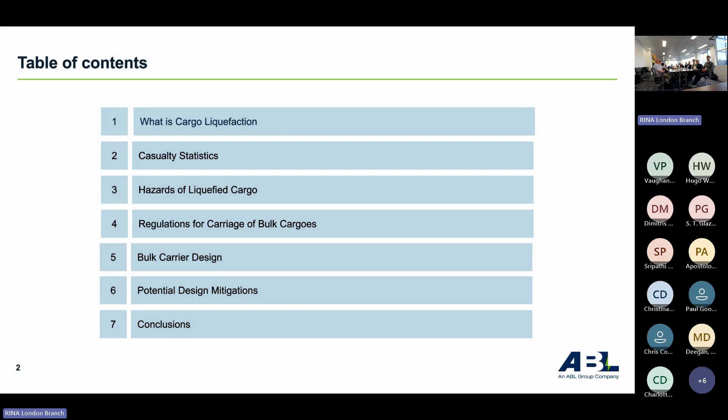First of all, what is cargo liquefaction? So, the cargo liquefaction phenomenon arises in solid cargoes that are loaded into bulk carriers. A solid bulk cargo is a cargo that is loaded directly into the hold of the ship. It's not containerized in any way. Generally it consists of particles or granules that are uniform in composition. And as I say, they're loaded directly into the hold, so there's no bags or containerization. They tend to be mined minerals as a common bulk cargo.

And one type of cargo that's not covered in this is grain. Grains have their own separate rules and regulations for grain cargoes that must be followed. So for liquefied cargoes, what happens is the cargo that's loaded, which is generally bulk, is dry. When it's loaded, it contains sufficient moisture to then act like a fluid during the voyage, so it might flow and move around the hold rather than staying solid, which is the assumption that's taken during the design.

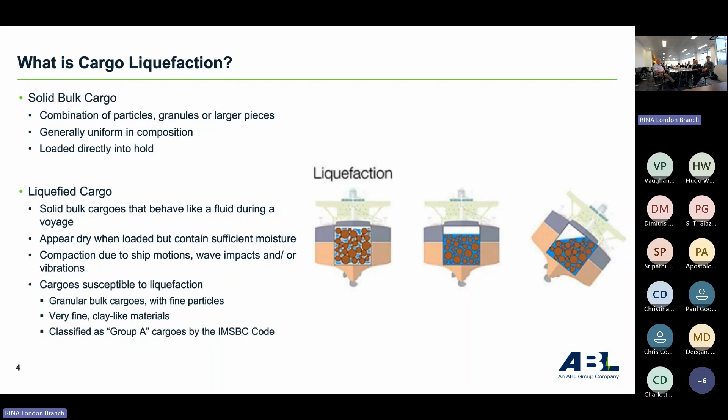So when it's loaded, it may look fine, but due to the motions of the ship and the wave actions or vibrations, it compacts, and then that's when liquefaction may occur. Some of the cargoes that are susceptible to liquefaction are granular bulk cargoes, fine particles, or clay-like materials, which are very fine in their composition. These are classed as Group A cargoes under the International Maritime Solid Bulk Cargoes Code, the IMSBC code, which covers the regulations for these cargoes.

So a bit more detail on the process of cargo liquefaction. I'm not a cargo scientist or an expert in soil mechanics, so it's quite high level. The top image on the left hand is a pictorial representation of the cargo as it's loaded, with the particles and then some moisture around it. You'll see the particles in contact with each other, so there is resistance to movement relative to one another. However, after the compaction, that contact's lost, so that shear strength or frictional resistance is lost. That's when it behaves more like a fluid rather than a solid.

The second type is for very fine material in the lower image. It's a different failure mechanism, but the consequences are the same. It's a fatigue type failure. So after a number of cycles of the ship rolling, that cargo stability then fails, and then you get shifting or moving cargo.

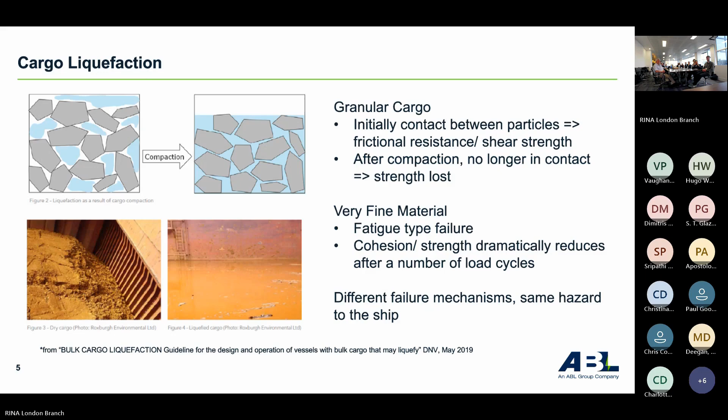There is another type of failure which is very similar to cargo liquefaction, but it is classed as a different failure. It's dynamic separation. So again, it happens due to the compaction of the cargo under vibrations, whether that's from ship motions or vibrations of the engine, where the cargo compacts and then the liquid rises to the surface. Moisture in the cargo rises to the surface, so you get that separation of the cargo and the moisture. And then obviously sloshing of water happens on top of the cargo.

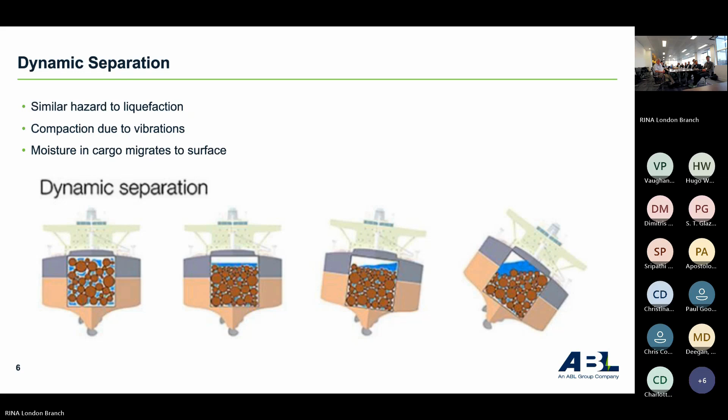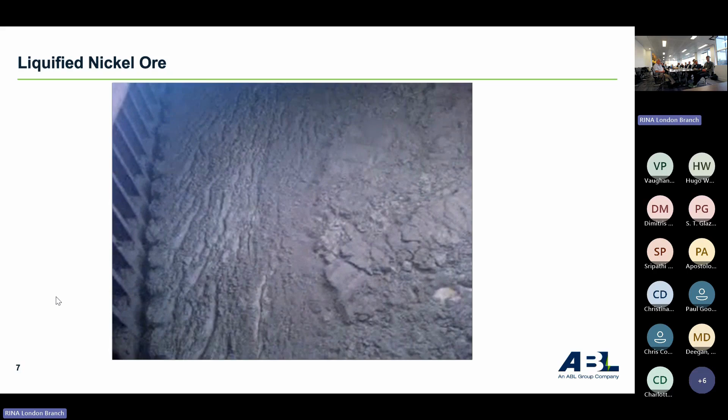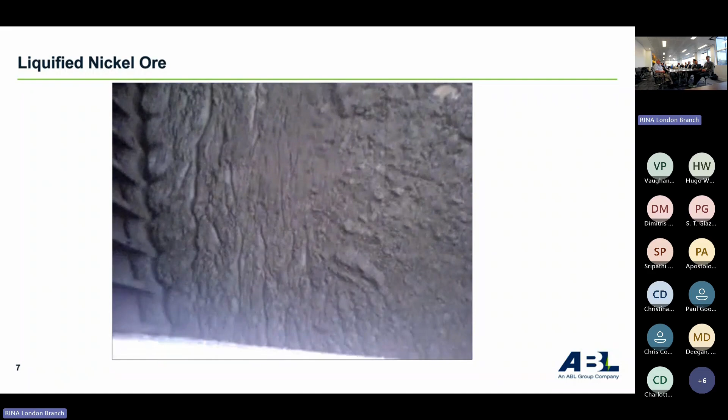So I have a couple of videos here, hopefully those will work. So this one shows a cargo of nickel ore that's liquefied. Nickel ore has been referred to as the world's most dangerous cargo. Between October and December 2010, there were 3 ships lost. So in less than 40 days, 3 ships were lost with the loss of 44 crew members.

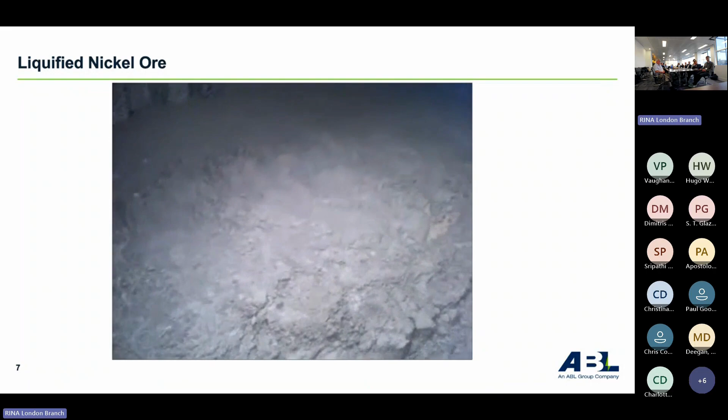So what you see here is the whole stow is essentially moving with the rolling of the ship. There's 8,000 tons of cargo in this hold. And as the ship rolls from side to side, the cargo moves. And you get that huge amount of kinetic energy as the cargo then comes back and hits the ship's side with a subsequent roll. There's about 500 mil or so gap opening up at the side shell with each roll.

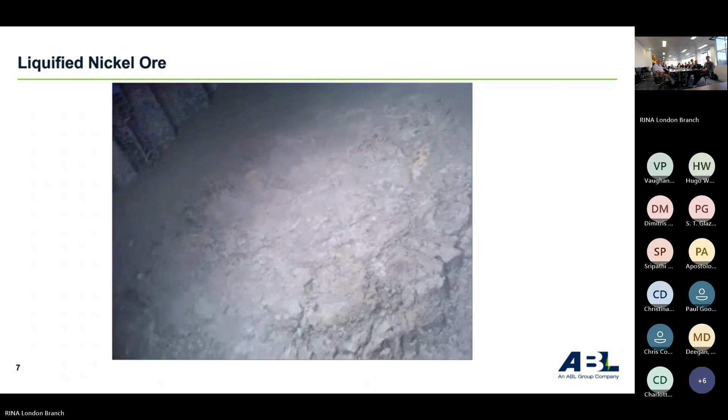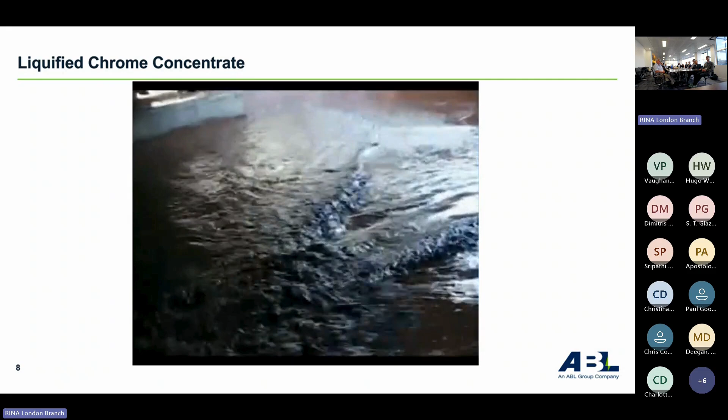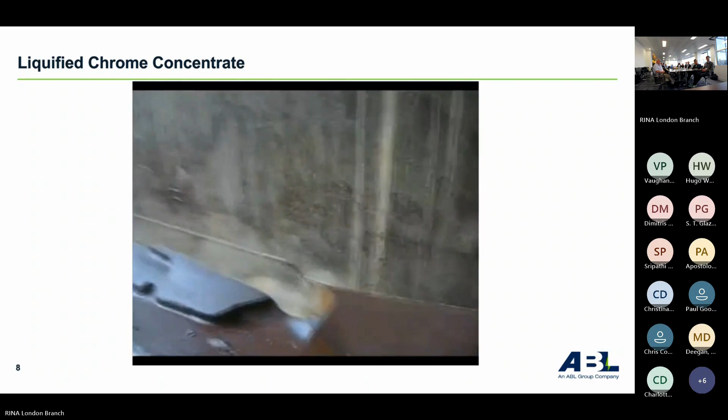The next video. So this is a video showing liquefied chrome concentrate, so a different cargo. And you'll see the water sloshing on the surface. So this cargo was loaded and left untrimmed. That means the cargo was essentially left in a big heap in the cargo hold. And within hours of sailing, it all flattened out, and the moisture had risen to the surface. The sloshing water caused damage to the boundaries of this hold, and flooded into the adjacent void spaces. So this just gives an idea of some of the potential risks.

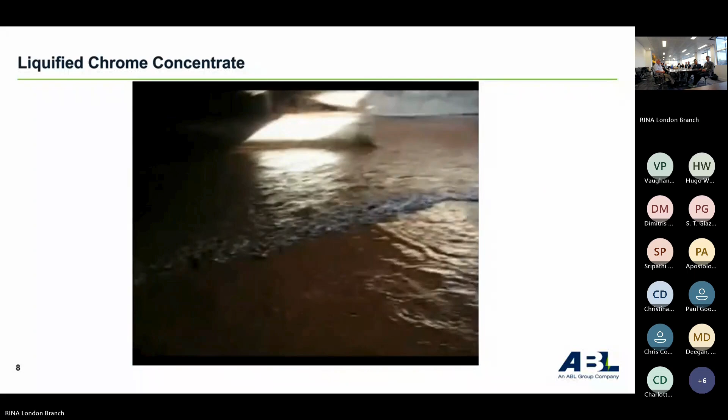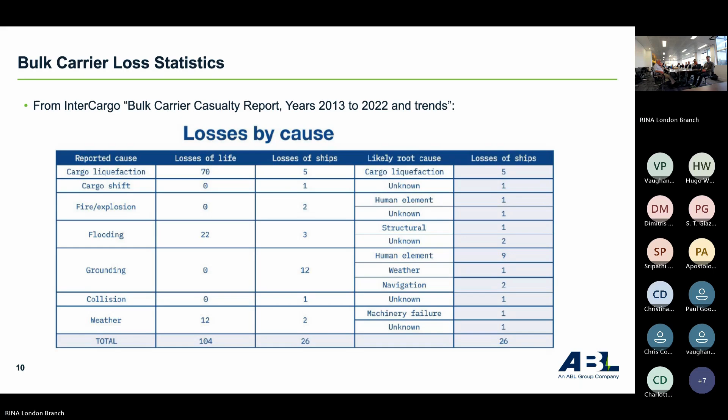But some of the ones, just to point out there, so the Harita Bauxite, that was loading its cargo in Indonesia. At the time, there were a number of other cargoes that were presented for loading, but were rejected because they were too wet. So the masters of the ships did not accept to load the cargo at that time.

The Trans Summer, from August 2013, that's one where you see there were no lives lost. The master in that case actually diverted because of bad weather, and it was anchored off mainland China, I think, when the incident happened, and it capsized. So it was relatively close to rescue, which is why all the crew were recovered.

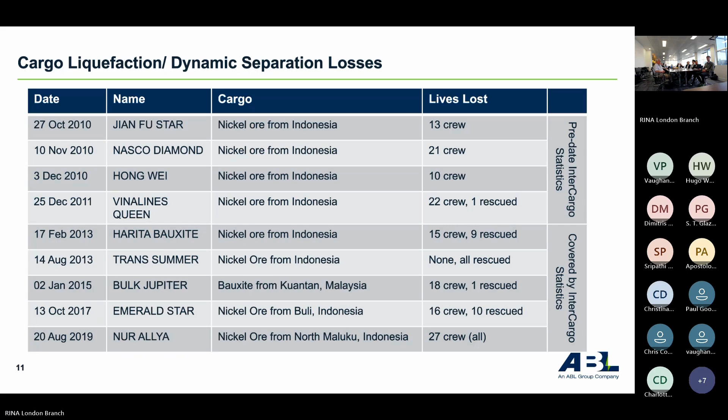There was a mix-up. Instead of putting water ballast in the double bottom tanks, they put it in the topside tanks. The list kept increasing, and then eventually the master ordered abandon ship. So that sequence all happened within the space of an hour. So it just shows how quickly things can progress.

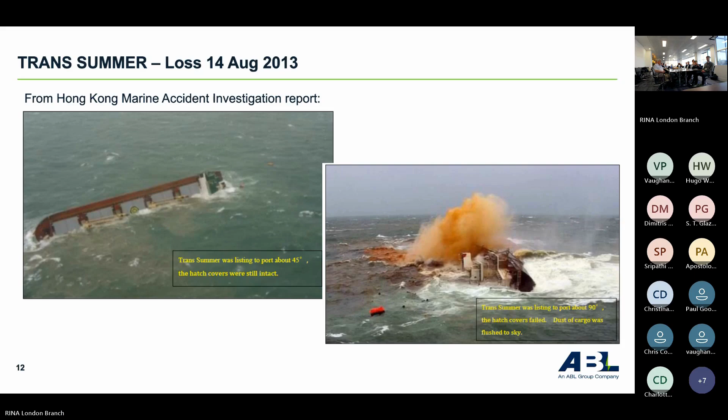So after seeing those photos and videos, just a summary of what are the hazards to ships of liquefied cargo. It falls under two main topics, either stability risks or hazards to the structural strength of the bulkheads and side shell. So from stability, from a worst case perspective, a solid cargo turns to full liquid cargo, so therefore you have full free surface effect acting in one or more holds, up to potentially all the holds, which ships are not designed to withstand.

Or a partially liquid cargo, where the cargo flows around, not as a liquid as such, but as a viscous flowing material, or the sliding cargo where it moves from one side to another and maybe becomes asymmetric in the loading, causing issues with a non-zero heel.

From a strength perspective, you see there the static hydrostatic pressure on the bulkheads and side shell that the cargo holds are not designed for. Obviously, during the design stage, bulk carriers are designed to withstand certain loads, but if this is outside that design,

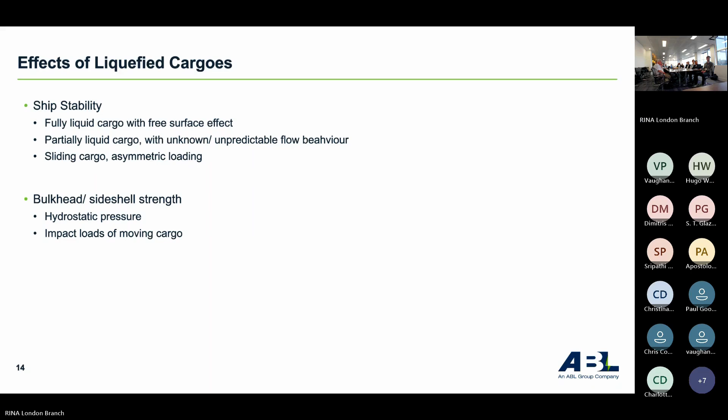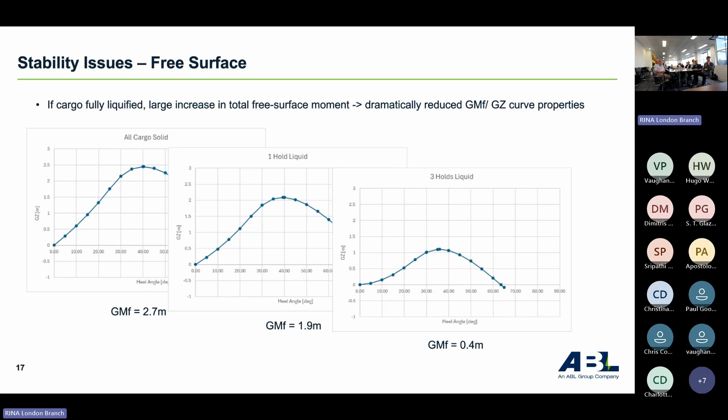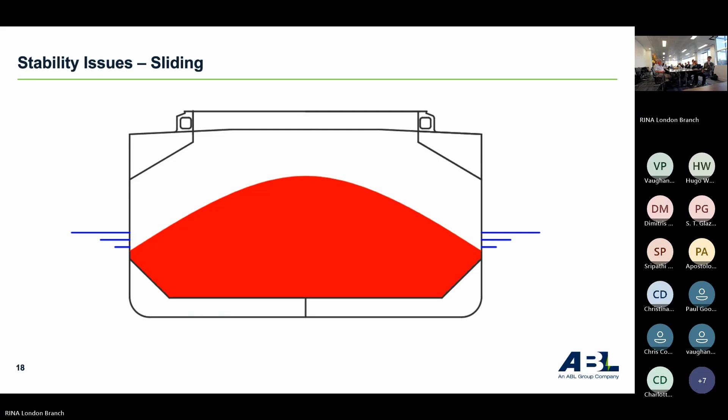So if we go through this sequence, due to the rolling of the ship, the cargo may move to one side and then settle with an asymmetric load. So then the ship has a non-zero heel.

Depending on the characteristics of the ship and the cargo, this could be up to 20 degrees or so. Potentially, this may have consequences for the operation of the ship. Not just the crew physically moving around the ship, but machinery may start to have issues working if the oil levels, for instance, drop too low.

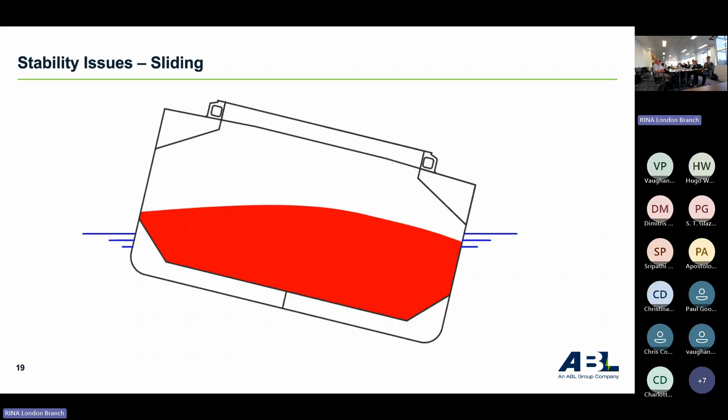So you may then think, okay, well, if that's the case, then we'll ballast on the other side to bring her back upright, as happened in the Trans Summer case that I showed earlier. So that then brings it back upright. So the cargo is off to one side and the ballast water is off the other side to counterbalance each other. However, this is then potentially another even riskier situation, because we know the cargo has a potential to move.

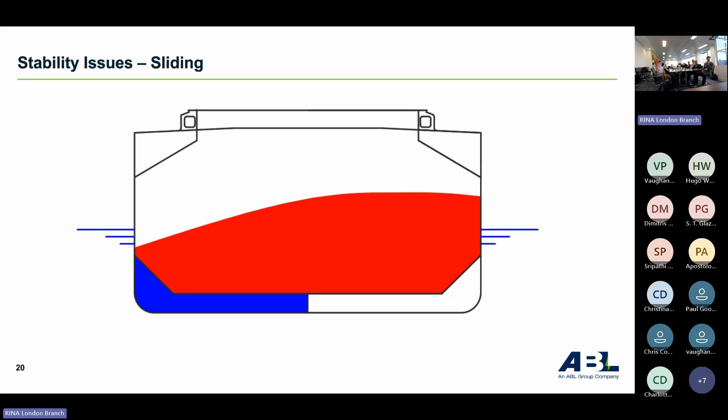It has already moved. So then, under the action of the ship, it may move to the other side, the side which you've got the water ballast on, so they end up with an even worse situation, which then brings the consequences. So you could be submerging down flooding points and all sorts of issues. So to do any kind of ballasting operations when you have a liquefied cargo or a suspected liquefied cargo is a very risky option.

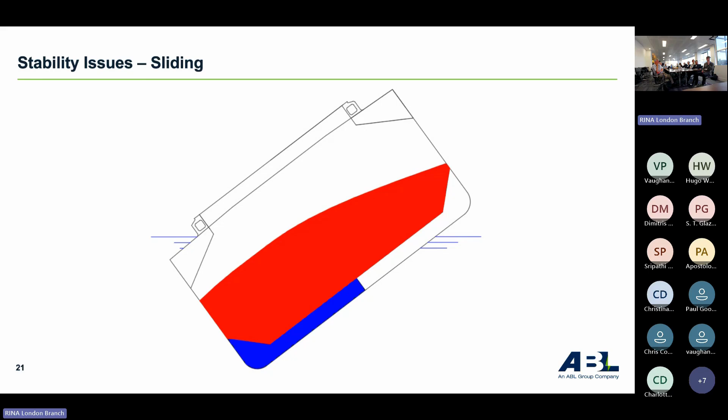So the design of bulk carriers in the class rules does not take account of the liquid cargo unless there are certain circumstances where, for instance, the middle hold of a bulk carrier is classified to take ballast water, so it will be designed for that case. But generally speaking, the holds are not designed for this.

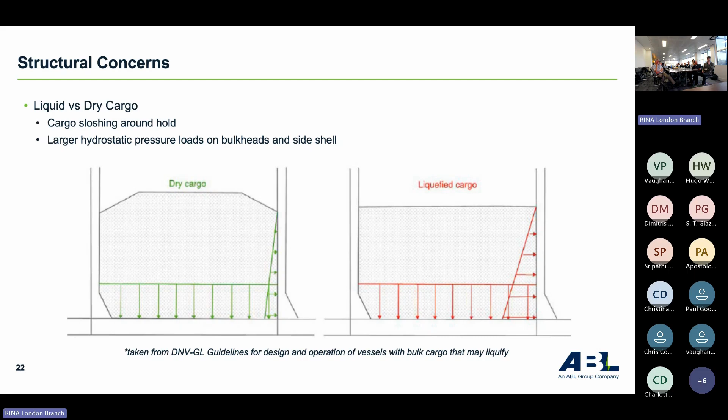So in terms of the regulations that surround the carriage of bulk cargo, they are contained in the IMSBC Code, the International Maritime Solid Bulk Cargoes Code. It's a mandatory code for bulk carriers. It became mandatory under SOLAS in 2011, and it contains guidance and recommendations for the safe stowage and shipment of solid bulk cargoes. It's constantly under review and updates. As we saw for the case of the bauxite cargo, after that incident, a new cargo classification was made. So yeah, it's constantly under review.

I guess one of the main points in the IMSBC Code is the classification of cargoes. So there's 3 groups: Group A, B, C. Group A is a cargo that has a potential to liquefy if it has a moisture content in excess of a defined transportable moisture limit. So Group A cargoes are the ones that have the potential to liquefy and cause the issues that we're discussing here.

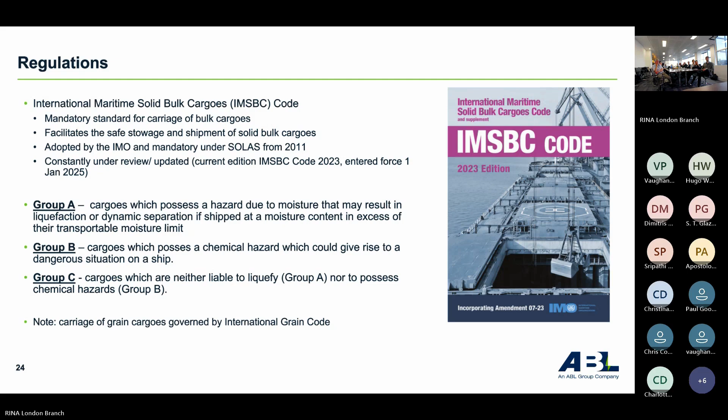So within the IMSBC Code, it gives a whole list of information, guidelines, recommendations for the carriage of different cargoes. And then there are detailed specifications for each of the defined cargoes. So they have what's called a bulk cargo shipping name, BCSN. That is a specified name that should be provided to the master of the ship, which he can then refer to in the code and check what precautions need to be taken for that.

For each different type of cargo, there'll be what's called a schedule, and that will contain specifics around the characteristics of the cargo, any information for specific stowage or carriage to do with that specific cargo, and then emergency procedures as well covered in that.

So for Group A cargoes, the ones that may liquefy, the transportable moisture limit, the TML, will be defined, and the specific cargo needs to be checked to make sure the moisture level of that cargo is less than that defined limit. So that's the limit that's considered safe for carriage.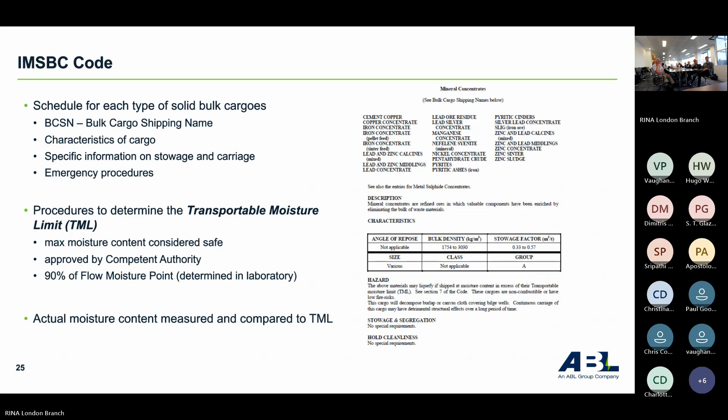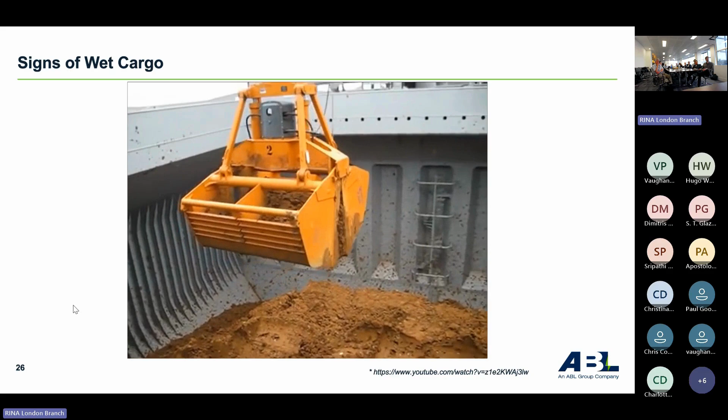So this is a video that shows you some signs of a wet cargo. If you look at the bulkheads or the sides of this, you can see the splatter marks. That's a classic indication that this is a wet cargo, and then you can see as they drop it as well, that definitely doesn't look like dry bulk cargo. So yeah, there's some signs for the crew that there's potentially an issue with this cargo.

Ideally, you want to identify that before you load it, because now it's in the ship, so what do you do with it? In this case, you can see there's grabs here, but there are load ports where they load by conveyor belt. There are no discharge facilities. So I have had cases before where the wet cargo has been on board the ship and there's no way to discharge it at that port. So it has to be carefully moved somewhere to be discharged.

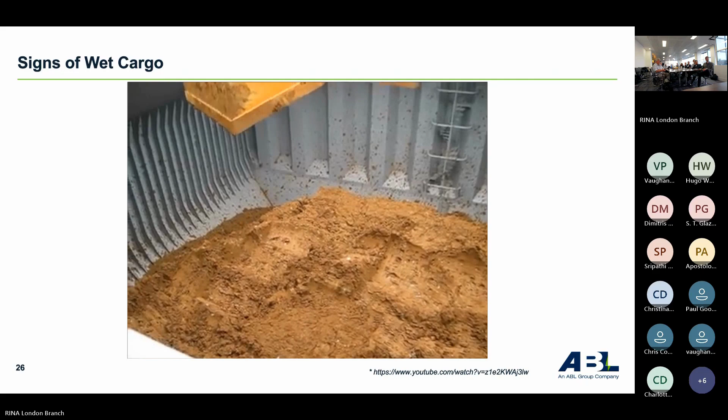So if the master or the crew do have any suspicions, there is what's called a can test. This again is in the code. This is like a simplified check that they can do just to confirm whether they think any further official testing needs to take place for the cargo.

So you can see on the right there's a picture of the stockpile, so that's the cargo that's due to be loaded, but it's covered in tarpaulins. But is that effective to keep the moisture out? And you can see it's sitting in a pool of water. So again, there's signs that there's potential issues here.

So to do the can test, you essentially put some of this cargo in a can and knock it on the desk or knock it on the ground 25 times, I think, and just check if the appearance of the cargo shows signs of having liquid and moisture in it. If there is, then that's when you can say further assessments are needed before loading it.

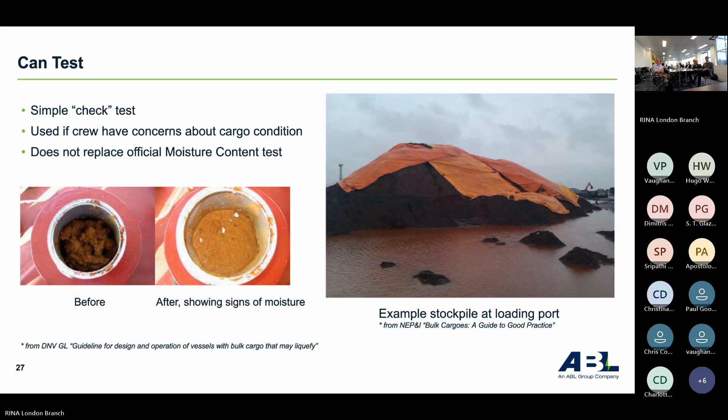So in terms of the design of the ships that carry these cargoes, the bulk carriers, what potentially is an issue. This just shows an overview of a typical bulk carrier, a 5-hold bulk carrier. So the holds obviously span the full width of the ship from side shell to side shell. There's big hatch covers to allow good access to the whole hold. So you can get a crane or a grab in to get whatever's in the hold.

And they're generally designed to be as flexible as possible, because they don't only carry bulk cargoes, they're sort of workhorses of the sea. They carry anything and everything. They make up about 40% of the world's tonnage. So yeah, there's a lot of these ships around, and they are designed to be extremely flexible.

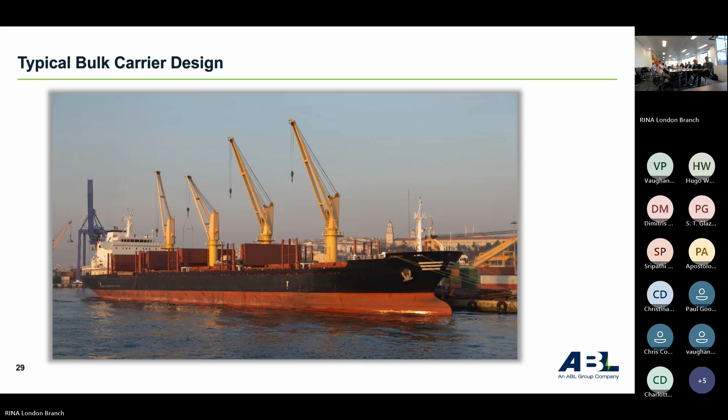This just shows a couple of sectional views of the holds themselves. As I was saying, the holds cover the full width of the ship. There's water ballast tanks below, or fuel oil tanks below potentially, and up in the top side as well. Single skin, so there is only a single thickness of steel between the outside sea and whatever's in the hold.

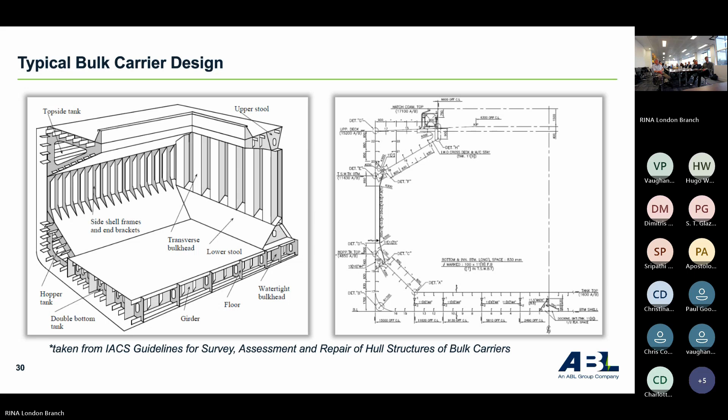So during the design of these bulk carriers, some of the assumptions that are made: they're obviously built to classification society rules, which again have some implicit assumptions about how they're going to operate, what cargoes they're going to hold. They're not necessarily liquid cargoes. And what kind of loadings are expected to be seen on the bulkheads and the side shell.

As I said previously, there are class rules specifically for holds that do or can contain liquids, generally the middle hold. But they are not applicable generally for the full ship. They're only applicable for certain holds.

From a stability perspective, again, at the design and approval stage, there will be a number of load cases made up and checked against the applicable rules and criteria, which will be shown in the stability booklet. These will make assumptions again about the state of the cargo, whether it's solid, the weight of it, the density, but not necessarily that it's fully liquid.

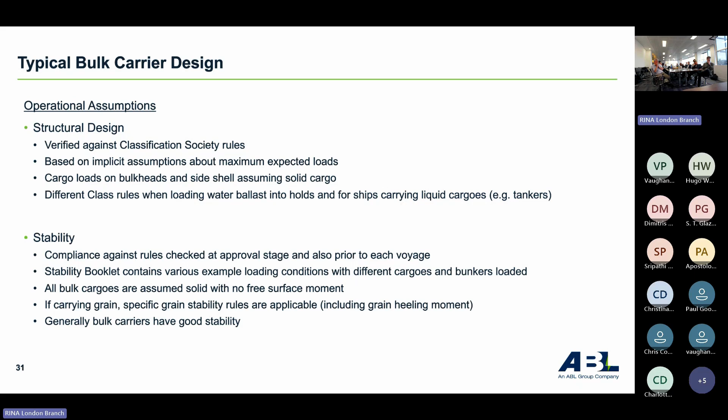In general, I'd say bulk carriers have good stability. I mean, they're boxy ships. They're beamy, so unless there are issues with liquefied cargo, they generally have good stability.

So what can be done potentially to improve or mitigate some of the concerns from a liquefied cargo, both from a structural perspective and also stability? From a structural perspective, I guess it's relatively quite straightforward. Make things stronger, so change the assumptions from a design stage to actually consider what are the potential pressures or loads applied to the different structures, including when you get a liquid cargo.

However, this obviously in general will add more steel, so therefore makes it heavier and makes the ship less efficient. And especially nowadays, everyone is looking to make things more efficient. So there's a number of cons to doing that.

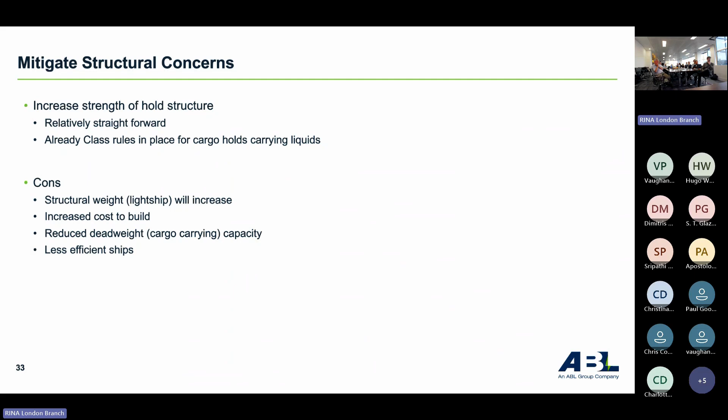From a stability perspective, operationally, there's a couple of points to consider. So trimming the cargo at the loading, so that is the case of not just leaving it in a big heap in the centre of the hold, but actually trying to spread it out so the top of the cargo's flat, move it into the corners of the hold to try and prevent any sliding. If it does want to start moving, then try and reduce that as far as possible.

And then from a loading condition, try and make the stability of the vessel, the GM, neither too big nor too small. Because if it's too small, you might roll too much, or if it's too big, you get high acceleration. So there's that kind of balance.

From a design perspective, I guess there's only really one effective measure that can be done, and that is more longitudinal subdivision. So instead of having holds that span the full width, put in longitudinal bulkheads to break that up.

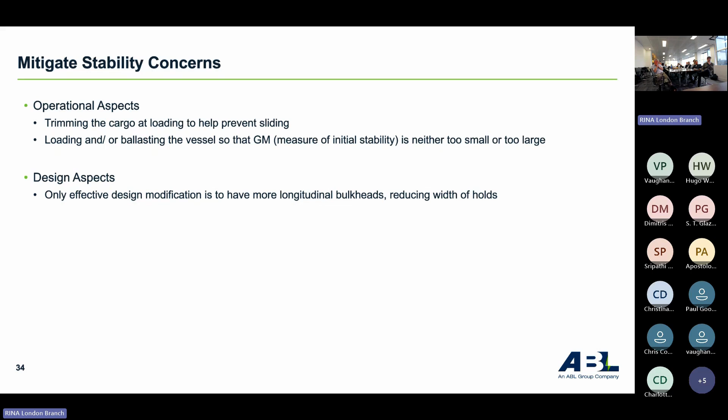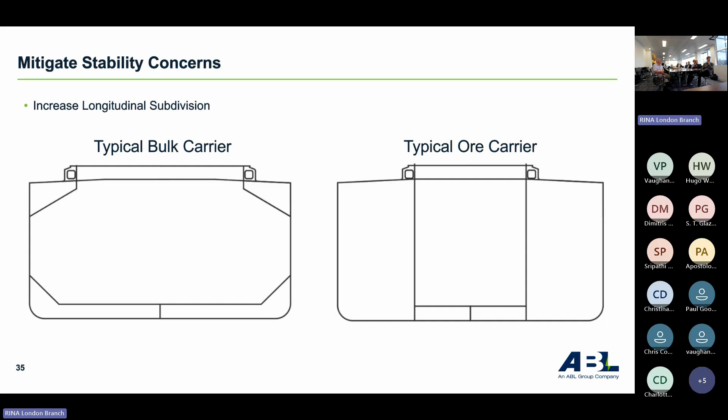This just shows an example of a typical bulk carrier on the left, where the hold, as I said before, goes side shell to side shell, but the ore carrier on the right has big side ballast tanks, because ore is quite dense. They don't need so much volume. They're more worried about the weight, so they don't need the full beam. So that's one potential. But then if you look at that, the cargo hold is far smaller, and it becomes far less flexible in terms of the different types of cargo it could carry.

Similarly with these examples of tanker vessels. So again, they are specifically designed for carriage of liquid, and you can see that they all have some kind of longitudinal subdivision to try and significantly reduce that free surface effect. But again, that's more steel, increased lightship weight, less deadweight, so it affects the operational efficiency of the ship.

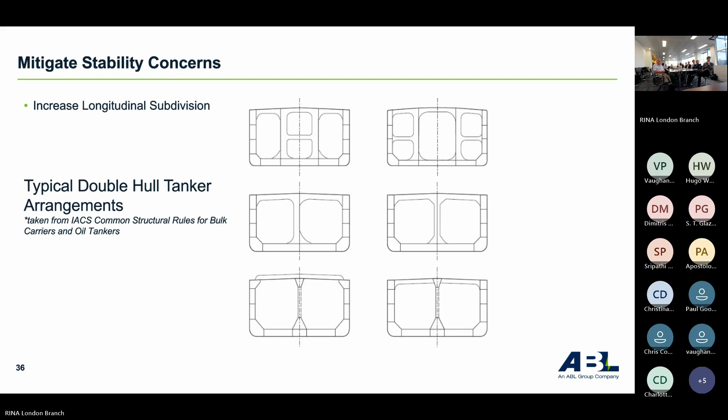Some conclusions. So one of the big points is that when cargo liquefaction does happen, there is a real risk to the vessels that are carrying the cargo, shown to be deadly, and it can happen very quickly, instantaneous, without warning, giving the crew very little time to react.

So there are regulations in place, the IMSBC Code, and they do generally work when they're applied correctly and followed. They are constantly updated, so they do try and incorporate any latest developments in different cargoes, for instance, or different types of testing.

So the typical bulk carrier design with its large hold is susceptible to cargo liquefaction, or there are potential design mitigations that could be done, although they have been shown to have some quite significant impacts on the operational profitability of the ships.

So one possible design solution that may not be liked by shippers or ship owners is that cargoes that may liquefy, the Group A cargoes, the most dangerous, are only allowed to be carried on ships that are specifically designed for the carriage of that cargo, which incorporates some of the aspects that we've been through, whether that's from a stability perspective or increased strength.